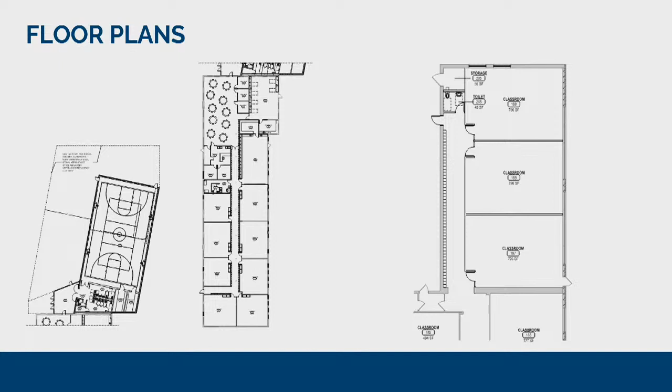Building elevation showing the proposed gymnasium.

As far as the site plan and traffic circulation, the building addition has been moved more towards the north versus towards the east, towards the existing building. As far as actual traffic circulation, Great Oaks is proposing that middle school drop-off and pickup would utilize the Elm Street access, coming in, circling around, and exiting back out the Elm Street access.

Elementary school drop-off and pickup would enter off of First Street and exit through the Elm Street access, coming in back behind the building, dropping off in front of the main school area, and exiting out of the private access. Public and non-peak Great Oaks traffic will be able to come directly through the site from Elm Street. There is an existing access easement that will remain as part of this application.

It basically extends from Elm Street all the way north and provides access to those businesses to the north. Access to the site from First Street does not have such an access easement for general public. Staff is suggesting, if approved, a condition of approval should be that an access easement be prepared and executed for the access off of First Street.

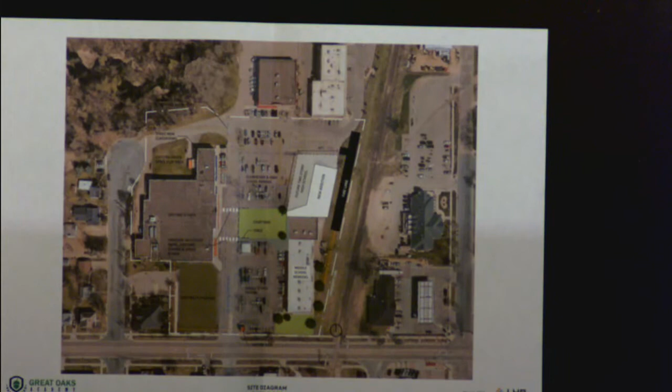Planning commissioners, we want to walk through a presentation of the actions we've taken since the April meeting. Our primary goal was to address your concerns, as communicated in the April meeting and in the findings of fact. That was our focus, to make improvements to the site plan, traffic flow, et cetera, to make this application the best it can be. So the plan here is to walk through those steps, look at the site plan and traffic flow, talk through our thoughts on how we prepared them, and answer any questions you have.

So first we'll start with the site plan here. One of the findings of fact talked about sight lines to the post office and the adjacent building to the north. Our previous application had our gymnasium right where the courtyard is now, to the north of that, in the center of the property.

The other thing you mentioned was the need for showing the full build out, K through 12, so we wanted to make sure we addressed that as well. We positioned both the gymnasium and the future high school to the north, as Mr. Whippler mentioned, north of the existing retail strip mall, which we will be converting to a middle school.

We positioned it as far east as we could to maintain that central lane between the two buildings. There is an existing fire lane right there, but to get those buildings as far east as possible, we would need to build a new fire lane, as Mr. Whippler mentioned, shown in that dark band on the right side behind the gymnasium.

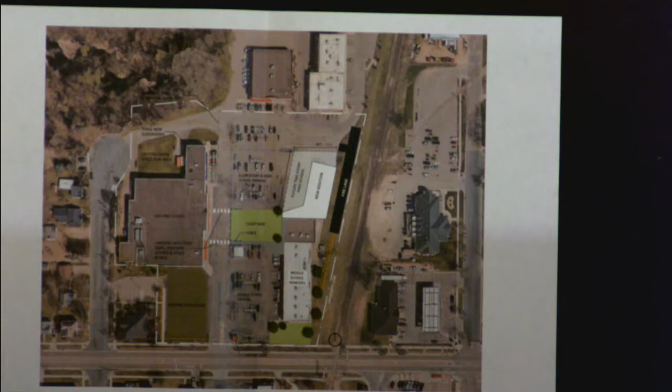Pretty cool. It's like a reverse of what I'm doing. Okay.

At this point, I'm going to have Kevin Holm come on up here. Kevin, introduce yourself real quick. My name's Kevin Holm, I'm with LHB, an architecture and engineering firm. We do quite a bit of K-12 and higher ed design. We've been hired by Great Oaks to help them with their planning process and approach.

The image on the screen right now relates to the circulation patterns. You can see there are two different pathways. As Tony pointed out earlier, the middle school would be the small loop on the east side and south side for parent pickup and drop off, and then the large loop that goes north on First and loops back south is for the elementary school and bus pathway.

One reason we're looking at it this way is you always want your students to get out on the curb side so they have safe access directly to the building and aren't crossing parent pickup, drop off, and bus traffic. Paul's group has done an incredible job of training the staff and parents in how to orderly enter, be dropped off, and be picked up.

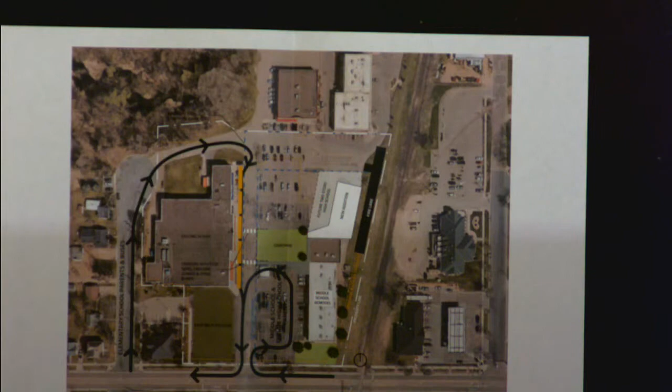My concern was for your students and for our residents - your students being out there with vehicles going by them, and for our residents, if they happen to meet at the same time, one going north, one going south. That was my only concern. I couldn't picture it in my mind.

Yeah, definitely want to avoid that. Sounded like Phil had a similar concern. No, I understand. That's why we have staff out there to keep... that's fine, I don't mean to beat it to death. No, I understand, I just didn't quite understand it.

Okay, no problem. I think the last thing just to mention, as Mr. Whippler said as well, is that we did do a full new updated traffic study for full K-12 enrollment with 840 students. I don't know that it's really worth going through exhaustively, but he did look at it year by year, looking at max enrollment year by year and our final enrollment of 840 students, and looking at the traffic, especially at those intersections.

As Mr. Whippler mentioned, as a condition, there are right turn lanes. The traffic study did indicate a right turn lane being needed onto the property. I think by 2028, but the city is looking for that earlier, understood.

I believe that's it - anything else you wanted to add? I'm open to questions.

Colin, can I just clarify something? The way it sounded to you, you said a turn lane - in the staff recommendation, it's 2. Yeah, we saw that. The traffic study said 1, but city staff is putting a condition for 2. Understood, okay, just didn't know if we're understanding correctly. Okay, yeah, very good.

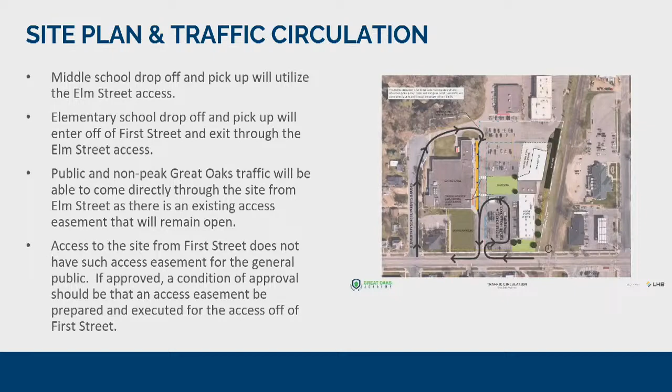I'm just trying to wrap my head around the statistics and the traffic study compared to this. When I was out there this fall and into winter, I monitored that street and walked up and down - if there were cars that came in that were our cars and they parked, just as you come in, I would go to them and say you have to go, you can't park here, you have to go around, you have to wait till your time to come in and then go through. On that drive I did that multiple times till people got the message there's to be no parking on that street, because I understand Mr. Marsh's concern about people parking there. Next year, and every year thereafter when we use that street, I'll commit 2 staff to making sure vehicles are coming in at the proper time, not stopping, going through our drive and around. I will commit those 2 staff every afternoon so we never have parking on that street. And with the ABCD group, we will never come close to exceeding what we already have coming in because of the way we're breaking it up - so we have an AB group, now we're going to go to ABCD.

Also, we start to dramatically decrease our car drop-off with the more buses we can afford to have. As our years increase, we get more buses, and we're going to very much push parents to use buses. We will push that hard, saying given the traffic flow of our school, given where we're at, we highly recommend that you use the buses that we're providing for you. And then breaking it into the ABCD should dramatically decrease the number coming through at that time.

And then the committed staff to being back there. And I promise you, I will have that staff saying to parents, no, you may not park here, you gotta leave, which is what I did. So, is there anything that's preventing you from using the buses you have now to just do drop off with kids and pickup versus having parents drop kids off?

We only had a limited number of buses, so the routes were limited because our finances were limited. This year is the first year that we don't have to share routes with Farmington District. We're able to purchase our own routes, which is a unique situation, meaning we can develop our routes and pick up more families based on our financial ability to do so. Every year that goes up with our enrollment, we can afford more buses and more routes. Thus, we can afford to pick up more people in larger areas. We're hoping to move into Lakeville by next year and then move into other areas. As we afford more buses, we get more pickup area. So that's generally what's inhibited us is the cost.

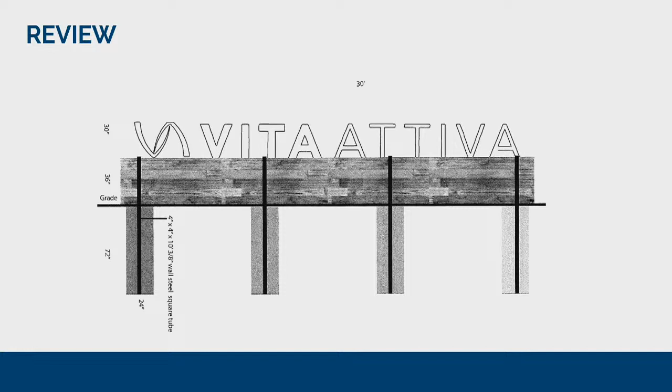Here's the elevations of the sign. It's 30 feet long, 5.5 feet tall, anchored by 4 wall steel square tubes into the ground. There's a color rendering that looks centered over the amenities building, facing towards Eaton Avenue. The sign would be uplit from the ground.

The action requested for you tonight is to recommend the City Council approve the attached resolution amending the PUD agreement to allow for this monument sign. I believe the applicants are here tonight if you have any questions.

I'd also like to note that I received an email earlier today from a resident at Vita Attiva expressing her disapproval of the sign placement, since this is the patio area for the amenities building and the sign would block the views of the pond. That email is attached in your packet.

Thank you, Jared. Would you add that to the public record, please? Correct, yep. Yeah, all right, thank you.

Mr. Whiteman, your thoughts?

I will say, first of all, that rendering was not to scale. It was much bigger than it really is. It's 3 feet tall. It's stone, I would say, almost looks like a retaining wall of some sort, 30 feet long with a nice stone cap. The letters themselves are the actual sign, which are 2.5 feet tall, creating that height.

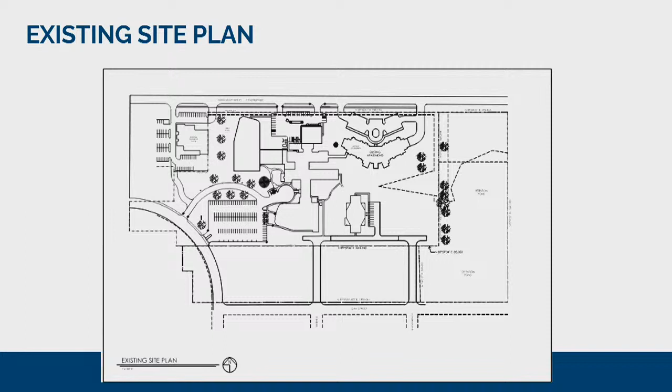This is the existing site plan showing the existing buildings on site. As you can see, the memory care unit, which is this building right here, is currently separate from the rest of the buildings. With the proposal shown here, this is the addition that's proposed, highlighted in gray. Connection will be made to that memory care unit, as well as, as I mentioned, to the existing apartment building at the northeast portion of the site. That's the main change they are looking to achieve with this PUD amendment.

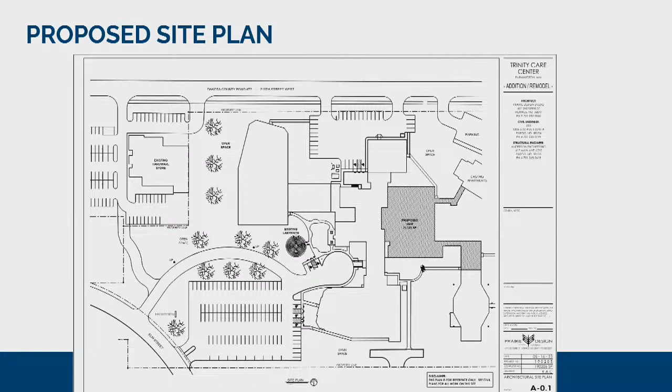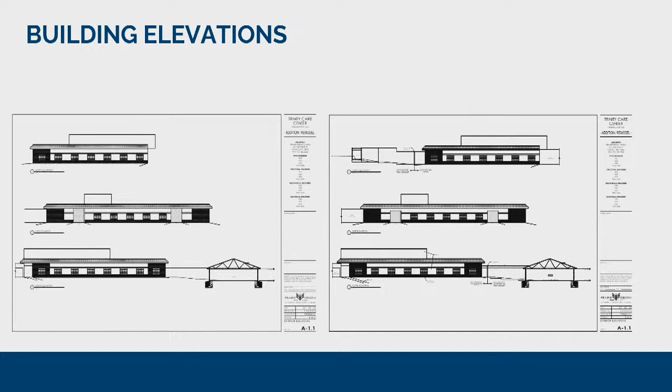As far as the bulk standards for the site, the current building coverage of the site is about 20.3%. With the proposed site work, the building coverage will increase to approximately 22.7%. The city's R4 zone, which this is located in, allows for a maximum building coverage of 30%, so it's well below that threshold. Required setbacks are 25 feet for front yard, 10 feet for side and rear yard setbacks.

With the location of the addition, it's basically central to the site, so setbacks are not an issue with what they are proposing. A total of 183 off-street parking stalls are provided on this site, which would exceed the requirements under the city code for a senior care facility, so there's no concern with that.

Therefore, the action requested this evening is that the Planning Commission should recommend approval of the attached resolution approving the third amendment to the planned unit development site plan for Trinity Care Center and forward that recommendation on to the city council.

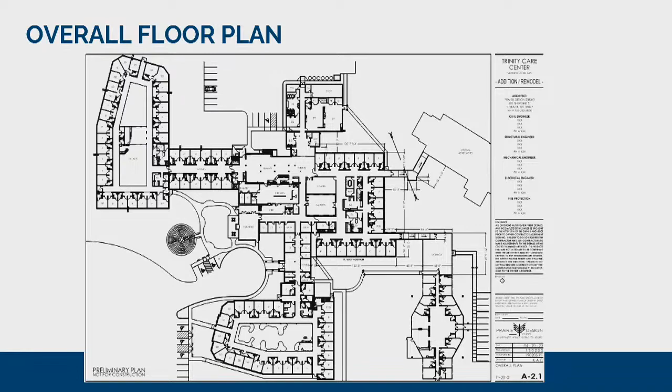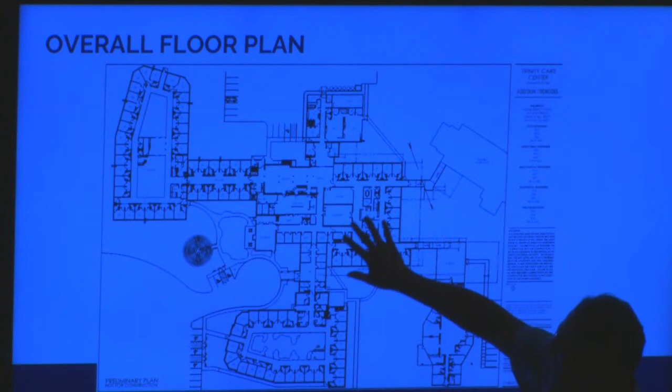Yeah, absolutely, go ahead. So right now there are two existing wings up here, and they are from 1969 era. It's the oldest part of the nursing home. The plan is to demolish that, make it more economical, more efficient. The area within the center includes the nurses station, conference room, bathroom, some employee areas, and so forth. The biggest concern staff has at the facility is the beds - they come in, they come out, and when you're talking about beds, they take up a very large area of square footage. When you start putting 15 beds and mattresses and all that type of stuff, the care center requires a large footprint. The best thing we can come up with is combined storage from our memory care unit that would adjoin with a connecting link to our skilled nursing facility. This would be cold storage space that's just used to take up the bulk of all those big ticket items.